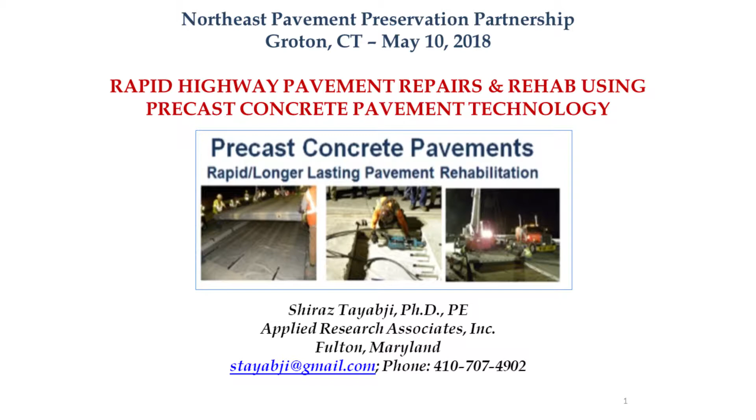It's my pleasure to be here, and I hope I can provide you some information on precast concrete pavement.

This is a new technology. It's been around about 17, 18 years. We had the first production project in 2001. Some of the states here have been implementing the technology. Robert is here, and Steve just did a project 2 years ago, and I'll be talking about Steve's project a little bit in this presentation.

So here I'm going to talk about this technology. There has been a lot of interest. A lot of states are now implementing this on a production basis, and many states have done their first project.

So this is a situation basically applicable to roadways with high volume of traffic, where you cannot do any lane closures during the daytime. Most of the lane closures have to be at night, and the work has to be done within a short period, between about 7 p.m. to 5 a.m. in the morning.

We have lots of congestion in our highways. I-95 is almost congested all the way from Washington up north. Any repair or rehab work we do, it has to be done at night.

So we have been doing a lot of work using what we call high early strength concrete, at least as far as concrete pavement repair and rehab is concerned, but that has not really consistently provided good performance, or at least long-term performance. Whenever we are repairing and rehabbing these high volume highways, we want a long-term solution. We don't want to fix the fix, going back every few years to fix what we've done.

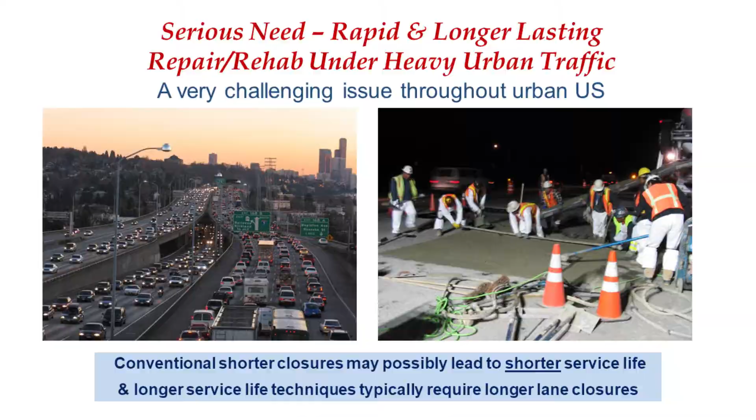So we have been doing a lot of high early strength concrete. It hasn't really worked that consistently. If we do proper concrete placement using conventional techniques, we require longer lane closures, which we can't afford to do anymore. So the solution is to come up with a technology where we can do this work rapidly at night and still get long-term performance.

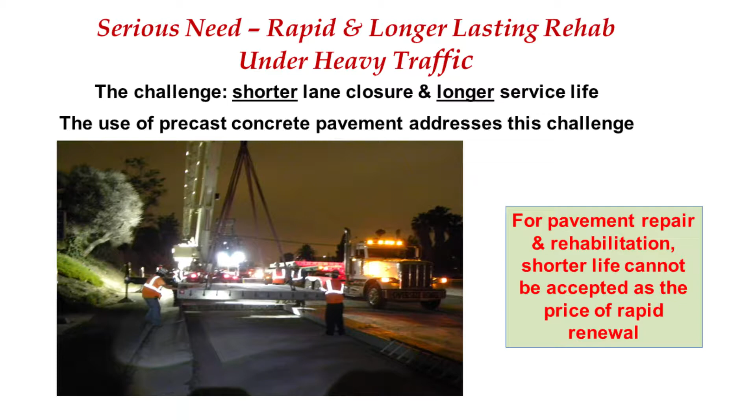And precast concrete pavement, we feel, addresses this challenge. During the SHRP 2 program, we came up with this: for pavement repair and rehabilitation, shorter life cannot be accepted as the price for rapid renewal. I hope everybody takes that as a mantra. So now we are looking for a longer-term solution, but very rapid repair and rehabilitation.

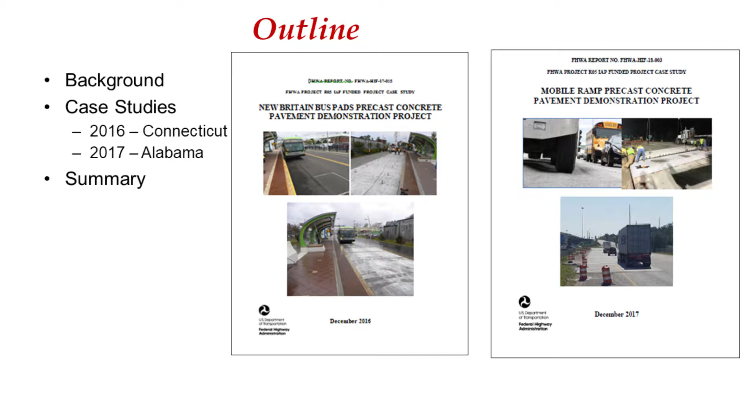I'm going to give you a brief background on the concrete pavement technology and give you two case studies: one, the Connecticut case study that Steve was involved in, or at least he championed it, and one project in Alabama.

So this is what precast concrete pavement is. Basically, it's use of concrete panels that are fabricated and assembled off-site, transported to the project site at full strength, and installed over a prepared foundation. The panels come at full strength, 28-day strength, or whatever it is, at 14 days, and you install it. You don't have to wait for the concrete to gain strength.

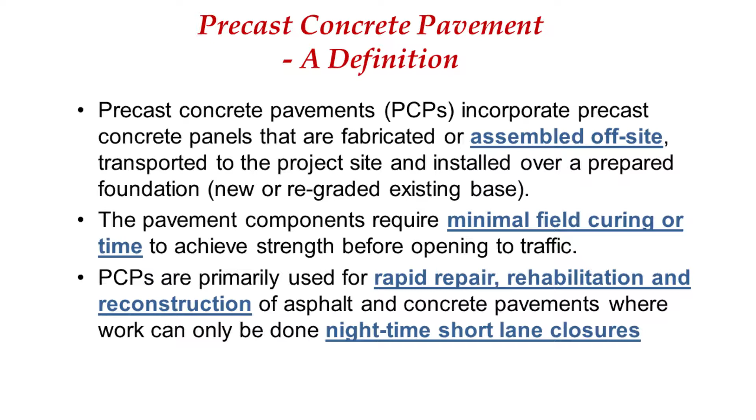So you can open it overnight, first thing in the morning. There is a requirement for use of rapid setting grouts and so forth, but it requires minimal curing. Within 1 or 2 hours we get the strength we need, and we are able to open to traffic by 5 or 6 in the morning.

Okay, just a very quick example. This is Robert's project, 2010 I think, on I-295. This is a repair application—basically we go and do full depth repair or full slab replacement. We do all the work similar to conventional repair: taking out the broken, distressed concrete, removing the concrete, preparing the base, installing dowel bars.

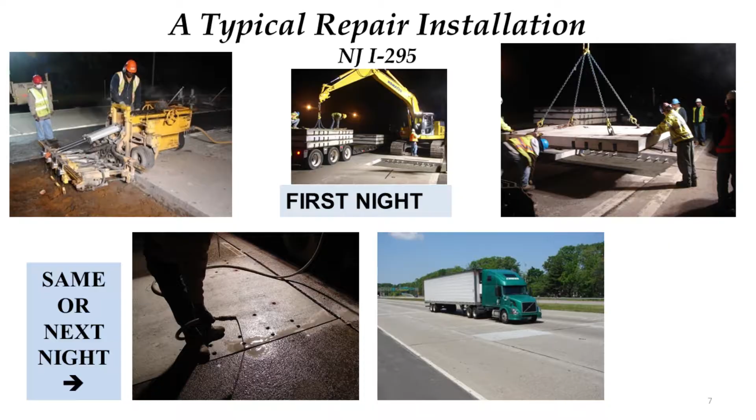Then instead of bringing the ready-mix truck with high early strength concrete, we bring concrete panels. We install the dowel bars already. We bring the panels with dowel bar slots at the bottom, and we place the panel where the slots match the location of the dowel bars.

All of this work is done, again, between 7 or 8 p.m. at night. By midnight we have done the preparation work. At around midnight we bring in the panels. By 4 o'clock or so, we have installed whatever panels we want, do the finish-up activities, and apply the grout at the bottom.

So this is rapid setting grout. Within 1 hour it sets, and by 5 or 6 o'clock, whatever the traffic requirement is, we open it to traffic. For the repair application, we can do about 15 to 20 repairs per night. This is another example.

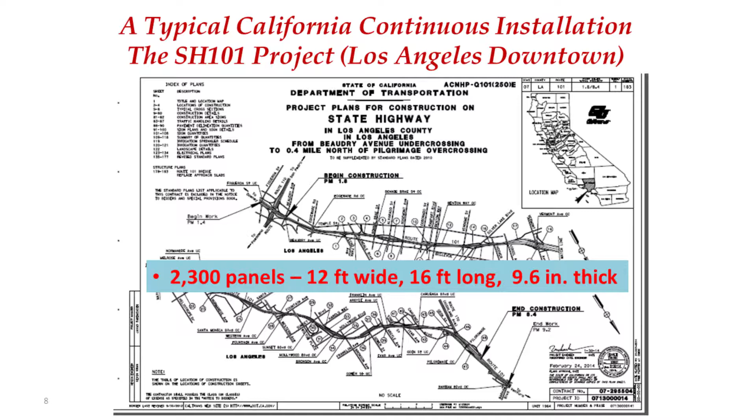This is a larger project that we are doing now in New York, New Jersey, California, Chicago area, and so forth. This is a placement of 2,300 panels on this project 2 years ago. 12-foot wide full lane width, about 16-foot long panels. California uses a metric system, so it's about 0.8 foot, so that's 9.6 inches.

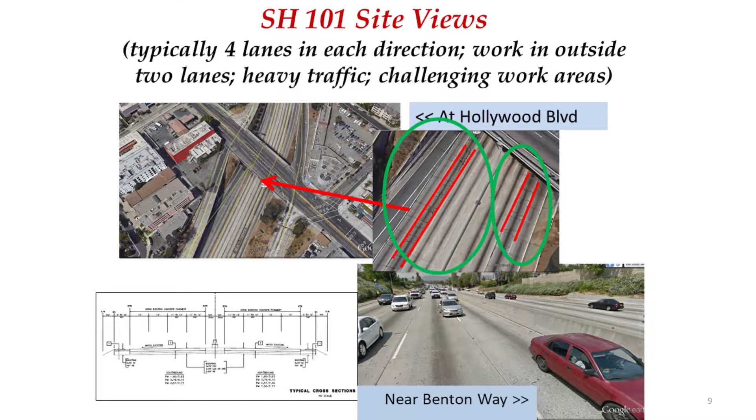So you can see this is around downtown Los Angeles, so lots of segments are being taken out. This is what the project looks like. We have a multi-lane highway. You can see the outside 2 lanes are distressed, a lot of truck traffic. This is about 40, 50-year-old pavement.

So we are going to go in and take one lane at a time. We are taking out the 2 outside lanes, but working on 1 lane at a time, about 600 to 800 to 1,000 foot sections. Under heavy traffic, there's so much traffic here that they couldn't work during weeknights. They had to do work only on weekend nights.

So this is the steps. Basically, we are removing the concrete. We are opening up about 800, 900 foot of lane, removing the concrete. In California, they also like to remove their cement-treated base or lean concrete base. So we are removing the concrete and the cement-treated base or lean concrete base, bringing in mobile mixers, placing a rapid setting lean concrete base. All this work is being done between 7 and 11 o'clock, all this preparation work.

By midnight, we are bringing the panels. The lean concrete base, rapid setting lean concrete base, has set sufficient strength. We bring in the panels, we are starting the panels. We are placing 1 panel every 6 minutes, so about 10 to 12 panels per hour. So within 4 to 5 hours, we have placed 50 panels, times 16, that's an 800 foot length segment.

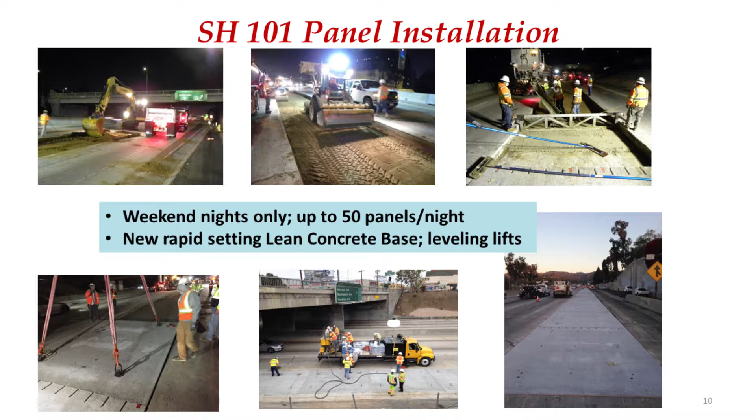By 5 or 6 o'clock, we are doing the finishing activities. You can see the grout placement, the bedding grout, and so forth. And by 6 o'clock, or whatever the time requirement was, we are opening to traffic. So we can do about 600 to 800 foot every night. On many of these projects in California, these are multi-thousand panel projects.

So this is the quick background. We did the first production project in 2001 at the Tappan Zee Bridge toll plaza. Again, used for rapid rehabilitation overnight, typically 7 p.m. to 5 a.m., and typically single lane repair or rehabilitation replacement.

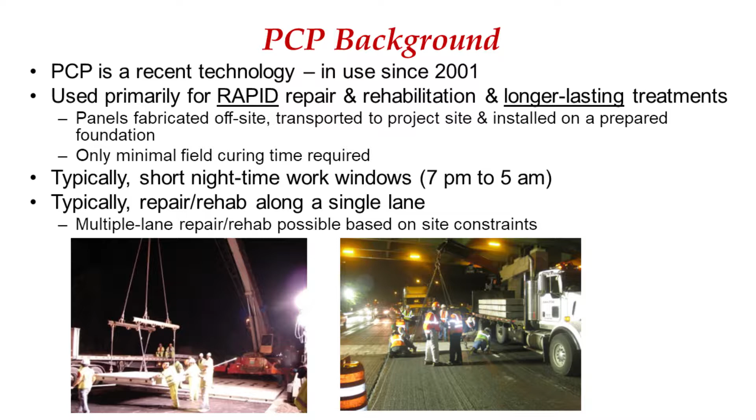So this is what it looks like. We have the repairs, where we are taking out distressed joints or full slab panels. Or we have continuous application, where we have a single lane replacement like a ramp, or just a single lane of a mainline expressway, or multiple lanes. There's also a post-tension system.

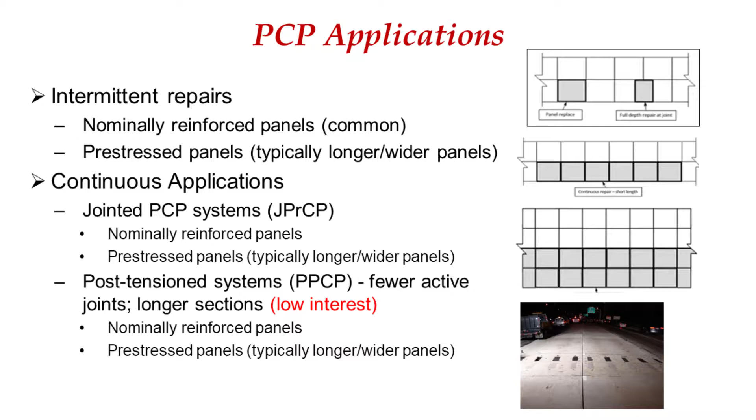Typically, we are using a jointed system. So most of our concrete pavements are jointed systems, and we are replacing with jointed panels. But there's also a technique called a post-tension system, where we connect multiple 20, 30 panels together, post-tension them, and that way we get rid of the intermediate joints. We just have an expansion joint at about 200, 250 foot. It's not very popular — California has done some projects, and Texas may do a project, but most of the implementation has been with the jointed system.

So another view of the application. This is the repair application and the continuous application in the bottom slide. We always need to provide load transfer at the joint, so we have different methods of providing that, which I'll discuss now. You can see at the bottom sketch diagram, the slots are at the top, and the photograph shows the slot at the bottom.

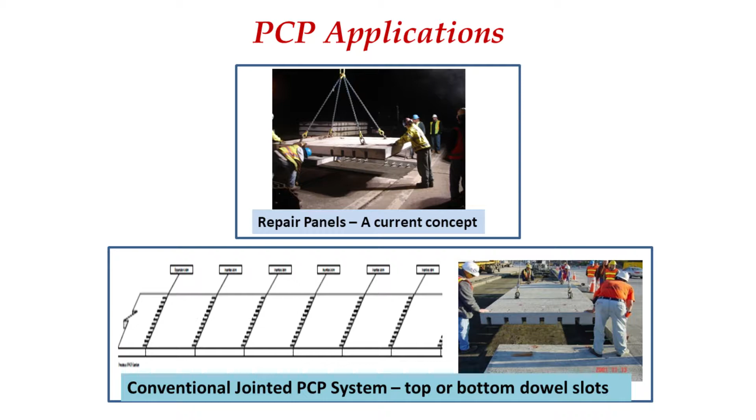So we have multiple different versions of how to provide load transfer. Our approach is this way. Basically, we are bringing the panel - this is a panel for scale, like my iPhone on my hand.

We come in and place it on a prepared roadway, and that is basically what we call a grade place system. More and more, we are using a leveling lift system because this doesn't give us the precise grade. When we place panels side by side, there is some elevation difference, and we have to grind it and so forth. So now we are using what we call the grout place system.

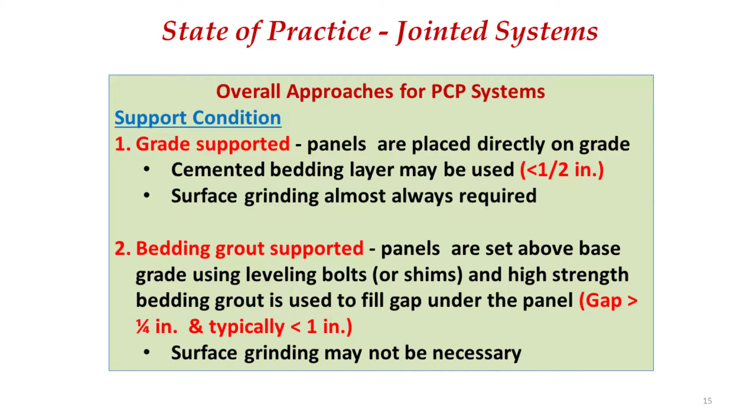We are bringing the panel, leaving a gap under the panel using leveling lifts, about a 1/4 inch to 1 inch gap. We come back and fill that gap with rapid setting grout. This way, we can use the leveling lift to adjust the surface elevation of the panel at the right elevation. Keep in mind this is lane-at-a-time replacement, so the panel elevation has to match the adjacent pavements, lanes also, and from panel to panel.

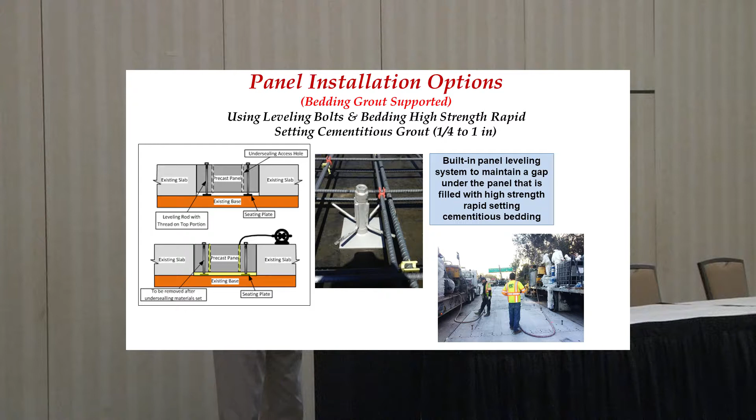So this is another view of it, using the leveling lift, grout supported system. You can see we have 4 leveling lifts at 4 locations. We set the panels at the right elevation, pump in the grout which sets within 1 hour, and we open it to traffic. The bottom photograph shows the continuous placement where tens of panels have been placed.

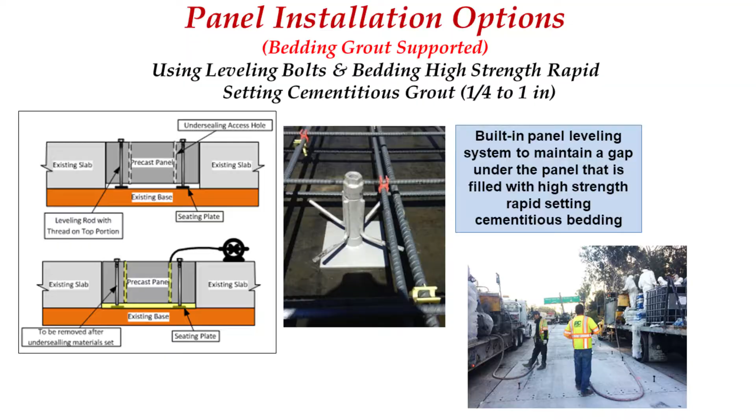You can see all the leveling bolts, and then we go in and apply the bedding grout using grout mixers. This is the grade place system.

Basically nothing new than what we are doing currently. We prepare the base, apply a bedding layer. We always need some sort of bedding layer because the panels come with a smooth bottom. The panel bottom is very smooth. We don't want to have any point loads if we don't finish the grade well. So we come in and apply it.

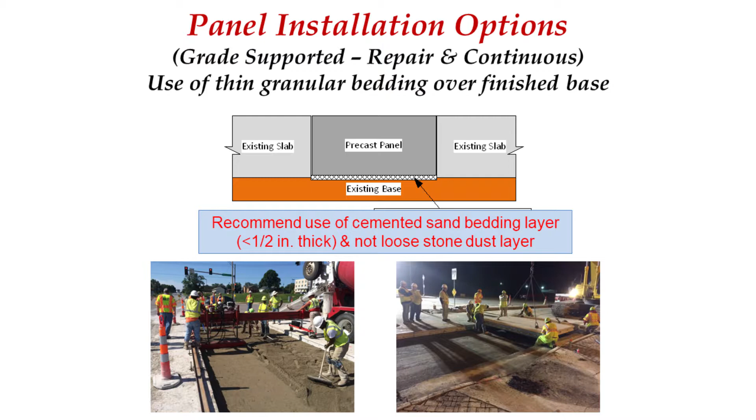In this case, we are using a cemented sand bedding layer. We smooth it out and then place the panel over it. So that was the support. We have 2 important criteria when we use precast concrete pavement: we have to have good support, and we have to have good load transfer.

Because the panels come with smooth sides, we also have to maintain a gap because we cannot place a panel in a hole within precise tolerances. So for placing the panel, we have to have a perimeter gap of about 1/2 inch around the perimeter. We would like to have less, but typically it's 1/4 inch to 1/2 inch for the transverse joints, and about 1/2 inch to up to 3/4 inch for the longitudinal gap.

So we always have to have a load transfer system. We are using what we call a modified dowel bar retrofit technique. We are using slots - you can see slots at the top. One panel has slots at one end, dowel bars at the other end. So if the slots are at the top, the panel with the dowel bar embedded gets slid into the panel that is pre-placed with the slots in front of it.

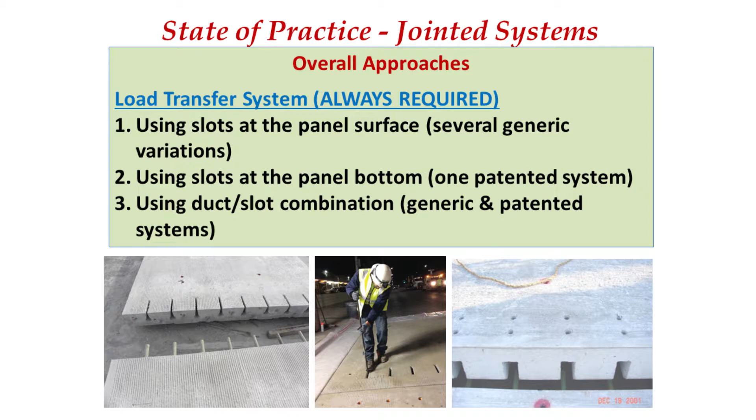If it's slots at the bottom, then basically we just bring the panel and slide it over the slot, or the dowel bars in the previously placed panel or an existing pavement where we have drilled and grouted dowel bars. There are other techniques - the third photograph shows a slot and duct technique. I'm not going to go into details because of time, but there are different versions available to achieve what we call a good level of load transfer.

This is how the panels are made. These are jointed panels, typically made in the precast plant, 6 to 8 panels depending on the area available to the precaster at this plant. We have seen projects where they also do panel fabrication in an outside yard. Depending on the number of forms you have, you can do 10, 20 or more panels. But it's a very standard procedure.

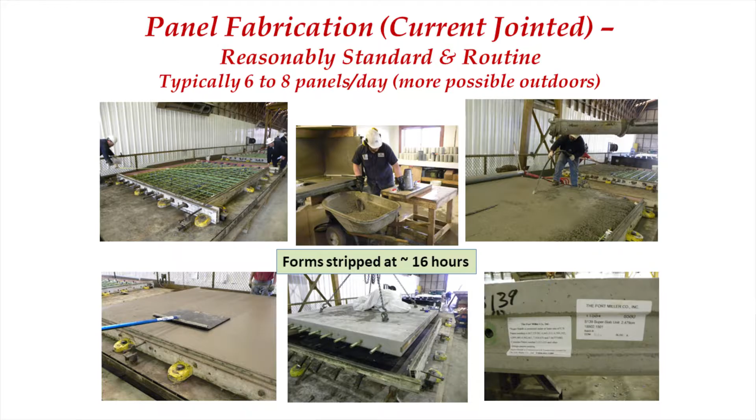We are using a lot of reinforcement. The code, for example the Pre-Stressed Concrete Institute code, requires 0.18% steel because we are going to be lifting the panels within 16 hours. So we cast the panels one afternoon, and the next morning we are stripping the forms, lifting the panel, and moving them. So every day we are fabricating about 6 to 8 panels. There has to be sufficient strength, about 2,500 to 3,000 psi within 16 hours.

And we need the steel, so if the panel cracks, nobody gets hurt. But from a pavement performance point of view, we don't need the steel. But because the steel is there, it helps - so if there is a crack in the future, the crack will be held tight. All other requirements for concrete, for the precast concrete pavement panels, is the same as what you would have for your normal cast-in-place concrete.

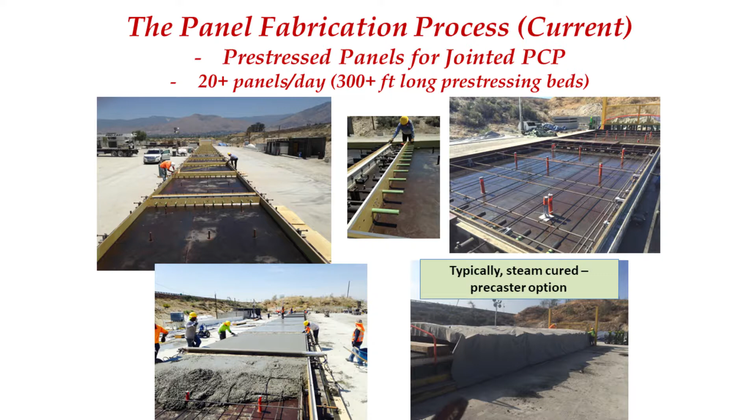This is what they do in California. Because they've got larger projects with thousands of panels used, they can't fool around with 8 to 10 panels per day. So they use pre-stressing beds. Here they can do a single set of strands, 20 panels per day. They save on labor, they don't have to set 20 sets of reinforcing beds and so forth. So with just one set of tendons, they can create 20 or more panels depending on the size of the pre-stressing beds. And again, they would use steam cure, so within 16 to 20 hours they're getting full strength, 4,000 psi. They strip the forms, and there's still a requirement for about 14 days of site cure, and then they're ready for use.

So this is where we are. In fabrication, we can do 6 to 8 panels, and maybe more depending on if the contractor wants to use an outside yard, or 20 panels if you're using pre-stressing beds. During installation, if you get a good project, we can do 15 to 20 repairs per night. For a production project with continuous application and longer lengths, we can do 40 to 50 panels per night.

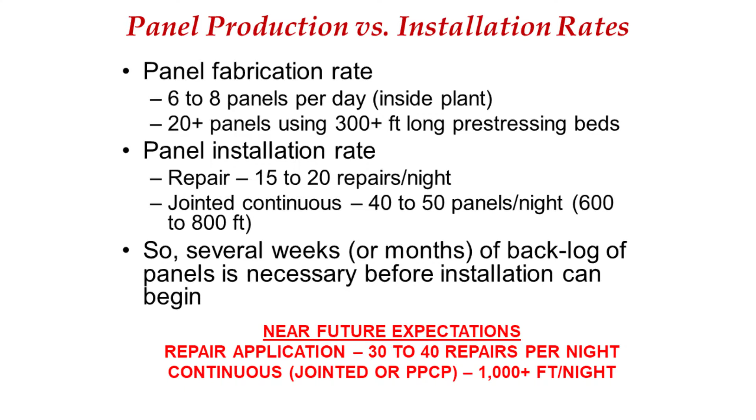So you can see the problem here. We need to have a backlog of panels, several weeks to several months. It's not like we award the project and expect the contractor to start placing panels within a week or two. It takes several months before it even gets to the site.

So just some construction considerations. Basically, we're using this technique to repair the surface layer only, as far as the concrete is concerned. In California, they go take out the surface concrete, and they also take out the base. But in most of the projects in New York, New Jersey, we are basically removing the surface layer. We are reusing the base, typically granular base, at least in the Northeast, or asphalt-treated base. If it's asphalt-treated base, most of the time it will come out with the concrete as you remove it, so you have to come in with a new base. If you're doing an asphalt rehabilitation, you are going to be using a new base.

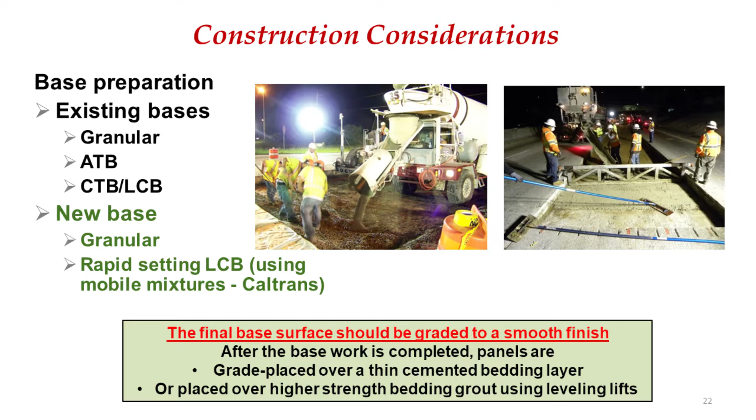So in terms of new base, you can use a granular base meeting your state specifications, or as they do in California, rapid setting lean concrete base. And in either case, whether you're using a new base or an existing base, you are grading it as much to the level as you need, and then still using a bedding layer, which could be cemented sand, or grout, rapid setting grout using the leveling lift.

Performance-wise, from some early installations, we are still learning. There were some issues, but as long as we know what the issues are, we can correct them — that's not a problem. When we have early age problems and don't understand what happened, then we're really stuck, and it gives a bad name to the technology. We have not really had any significant failures. The few failures or early cracking we've had, we know why it happened, and it's not happening anymore. We've done deflection testing, with very good response at the joints and so forth.

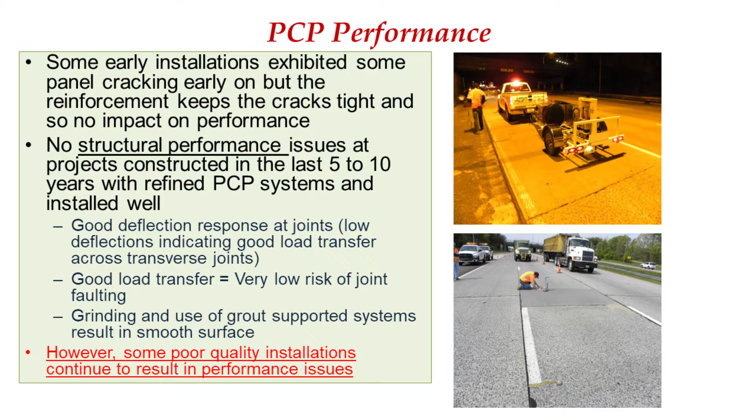We get the best, we use the best concrete. It's very controlled in the plant. We make the panels very well, but the problem is in installation. If you don't have a good contractor or the quality control isn't there, then the project is going to suffer, and we have seen some issues every now and then.

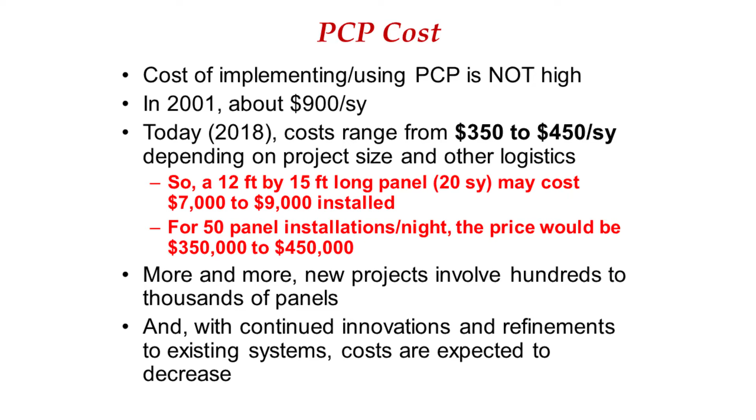There's always a question about the cost. In 2001, it was $900 per square yard. Now it's about $350 to $450 per square yard. If you use high early strength concrete, we're basically at $250 to $300 per square yard. So that's where we are. Hopefully costs will keep coming down.

I'm going to give you a quick example of two of the projects we had. There was a big study on the SHRP 2 program, where we developed guidelines and so forth.

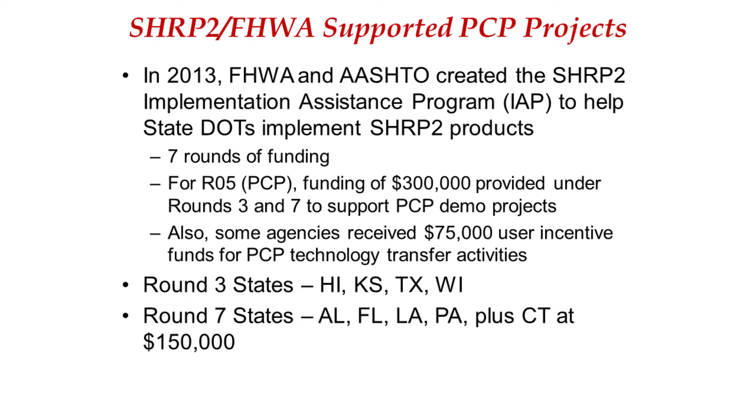FHWA and SHRP2 said this technology is ready for implementation. They supported the implementation, coming up with some funding, $300,000, to support several agencies in doing their first demonstration project. The states are listed here, and these are the different projects they did.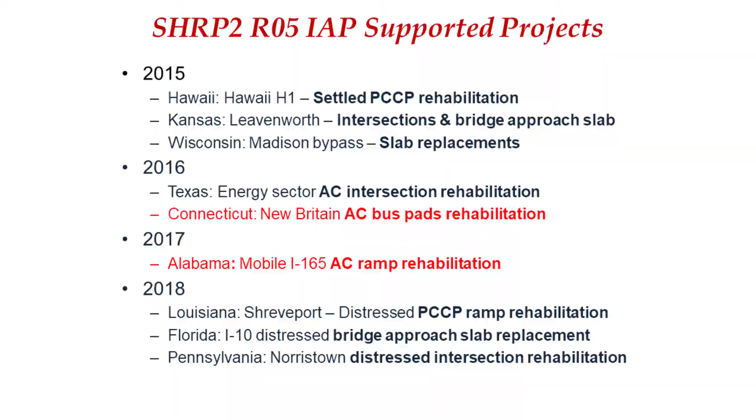Hawaii did a project, actually the first one to do a project, on settled concrete pavement. They kept overlaying it with asphalt, and they used this to restore the elevation. There were all these other projects, but I'm going to give you a case study of the Connecticut project and the Alabama project.

Steve was the one who championed this, secured the funding, and made sure the project went well. This is part of the CTfastrack, on a railroad track that was abandoned, and they decided to do a rapid busway connecting different cities.

Unfortunately, the architect for one of the stations didn't specify concrete pads for the bus stop. Here you can see the bus there. The asphalt keeps rutting, and within a few months it was rutting so badly they couldn't even open the bus doors. So they had to come, mill, and replace it.

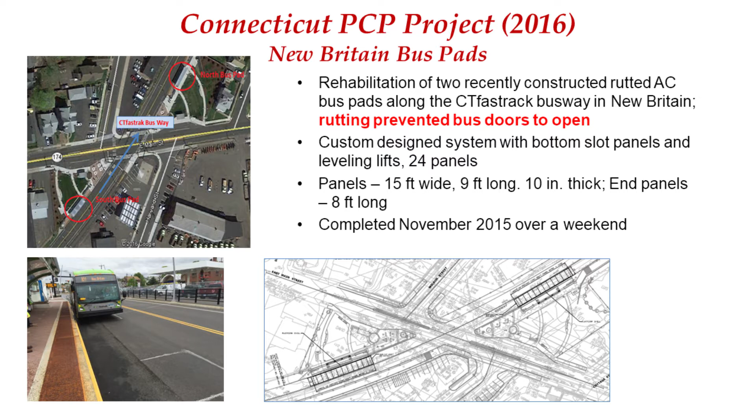When this project came about, they said, okay, we'll just go in and do a precast project. They got 2 bus pads in different directions, about 120-foot long segments, using 12 panels in each bus station, 15-foot wide, 9-foot long, so about 110 feet long total. That's the layout of the panels.

This was going to be weekend work. They shut down for the weekend, started work Friday night, removed the existing asphalt pavement, placed a new base, and then during Saturday morning, placed the panels, grouted it, did the finish work on Sunday, and opened to bus traffic early Monday morning.

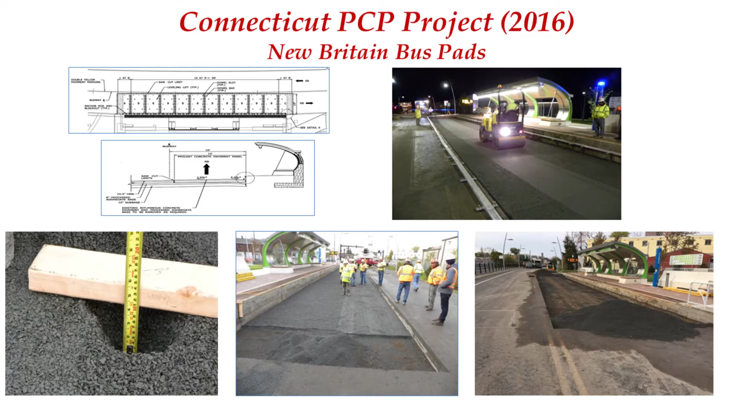Here I'm showing some slides. The contractor removed the asphalt, but unfortunately ended up removing a little too much. So he came back and placed a loose granular material as shown here. This loose material we typically use in a 1/4 inch to 1/2 inch thickness, but when it's 3 or 4 inches thick, there's no stability.

You can compact it, grade it, and compact it 10 or 20 times, and you can still go with your hands and lift out a bunch of the aggregate. We realized that and told the contractor to remove it. On one bus stand, time was short, so we had him remove it at the end 6 feet. When I say we, I mean the DOT in a generic sense. On the other bus stop, when there was still some time, they removed all of that loose material and replaced it with proper base material.

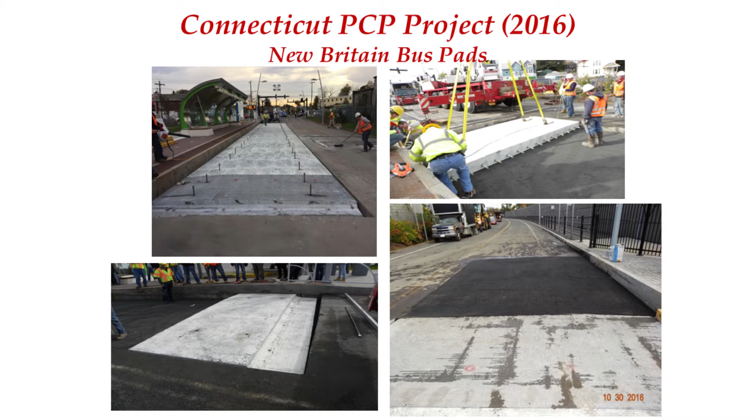Now we are placing the first panel, the next panel, and in the bottom you can see all the panels, 12 panels, laid out with leveling lifts, set at the right elevation. We come back, grout it, and then by Sunday night they came back and did the asphalt transition at each end. That's what the bus stop looks like.

It's been there about 16 to 18 months now, and I guess it looks pretty good still, with no issues.

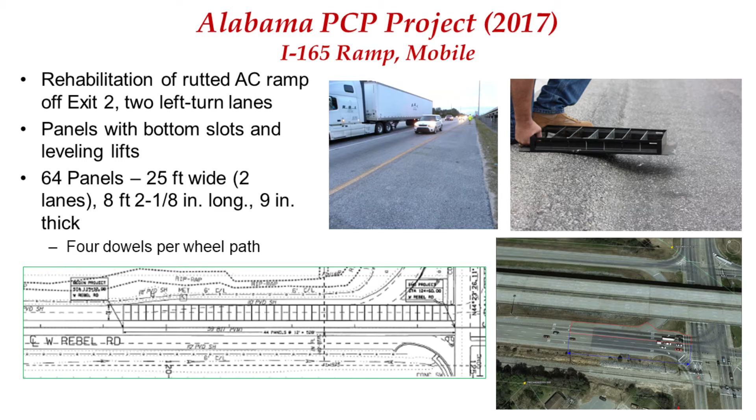This is another project, another unique use. This is a ramp coming off I-165 in Mobile, Alabama, with a lot of truck traffic going to the port of Mobile. The existing ramp was an asphalt two-lane turn that was rutting quite a bit, due to hot weather and hot temperatures.

You can see the amount of rut. Every 6 months they would go and mill and replace it. When this opportunity came, they decided to put in precast concrete pavement. In this case, for the two-lane road, they decided to use panels 25-foot wide and about 8 foot long, just because of the weight and so forth, 9 inches thick.

That's what the panels look like, again with a leveling lift. You can see the amount of reinforcement in the panel at the precast plant.

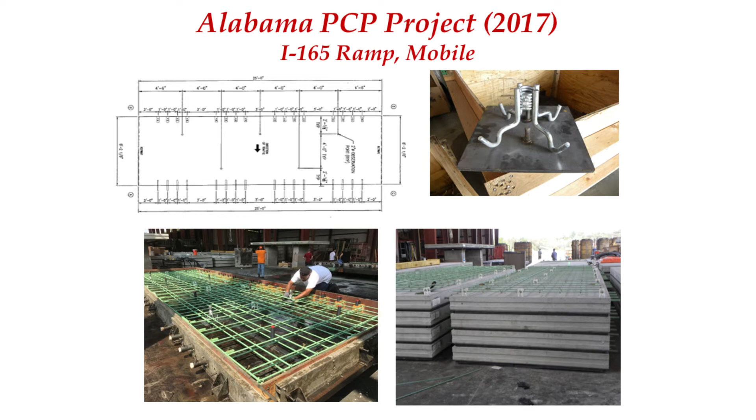Now we are at the site, and the contractor is digging out the asphalt plus some of the base material, then grading the base, applying that cemented sand layer, and starting to place the panels.

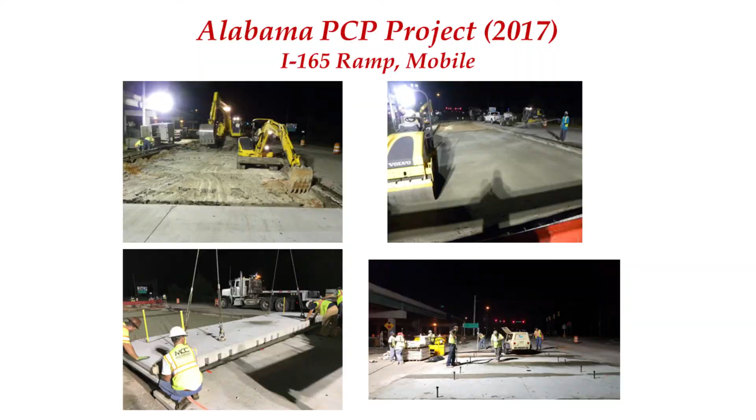These are 25-foot wide panels. Halfway through, the hurricane Irma came through, so they had to stop work, but they had a lot of traffic going over half of the project with no issues. It was able to accommodate all this heavy traffic.

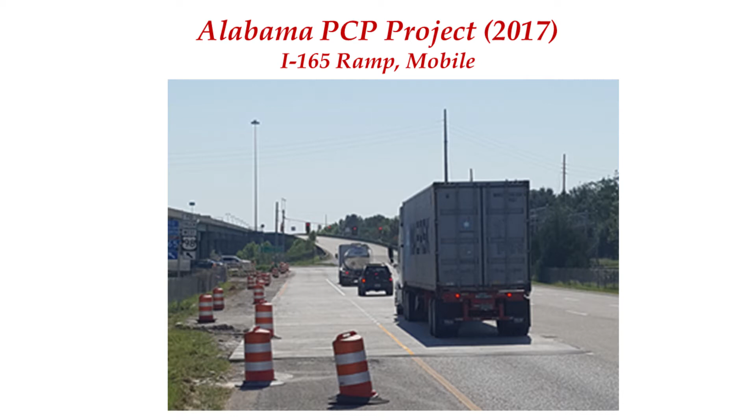You can see again the leveling lift panels and so forth, and this is what it looks like: two-lane, left-turn lane, reasonably heavy truck traffic, and a year and a half old. They're happy with that. So this is where we are — there are lots of states doing production implementation.

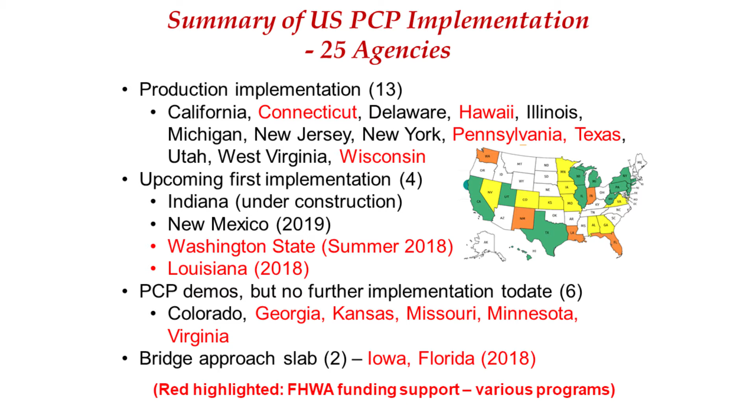I'm not going to read the list. We have some upcoming implementations. The first implementation in Indiana, New Mexico is doing one next year. Washington State and Louisiana are doing this year. Louisiana is ongoing right now.

So in summary, all agencies are happy with the end product. For many of them, this was their first project. For most of the contractors, these are always the first project. If you have good plans and good specs, you are able to get a good product.

So we have limited experience, but the oldest project is now 17 years old, the Tappan Zee project. We don't see any issues with that, so we think this technology, if implemented correctly, should provide us that 20, 30, 40 years of service. Okay, thank you very much.

Any suggestions with CRCP pavement patches? Yes, we just did a project last fall in Chicago.

I-294, I-80, the Illinois tollway on the Chicago side. So it's CRCP. There were some issues, so basically we went in, took out the CRCP portion sections, and then came in with precast panels with a heavy amount of steel that matched the amount of steel in the existing CRCP, so that's 0.7% steel.

In this case, we ended up using number 10 bars at about 12-inch spacing. We extended the bars out of the panels because they also served as load transfer dowel bars. So we brought in the panels, leaving a gap of about 14 inches between panels and between the existing pavement.